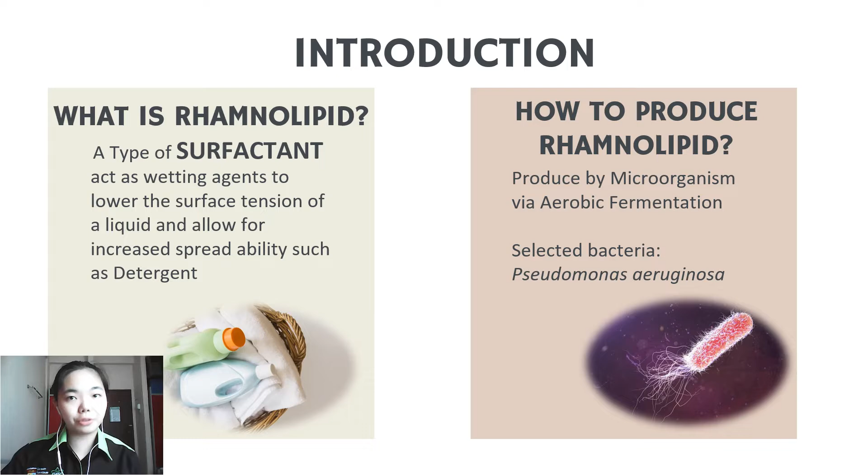Usage and applications of rhamnolipids. Firstly, bioremediation. Rhamnolipids are used to remove heavy metal and petroleum pollutants from contaminated sites. Secondly, agriculture. Rhamnolipids play an important role in the efficiency of new biopesticides. Thirdly, food industry. Rhamnolipid can improve the stability of dough, texture, volume, and conservation of starch-containing products.

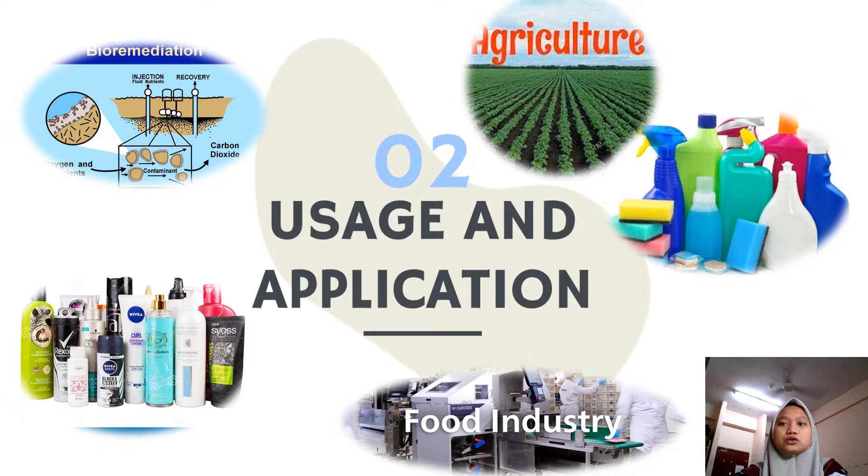Next, cosmetic and pharmacy industries. Used in several healthcare product formulations such as toothpaste, deodorants, and contact lens solution. Lastly, detergent formulations, used as biosurfactant.

Next is economic analysis of rhamnolipid. The figure shows the global demand and supply graph of rhamnolipid from the year 2019 to 2026. The rhamnolipid market is expected to grow with a CAGR of 5% from the year 2020 to 2025. Next, market price of rhamnolipid. The global rhamnolipid market is predicted to be at 4.2 billion USD in the year 2017 and to reach 5.52 billion USD by the year 2022 with a CAGR of 5.6%.

Next, for plant capacity, there is a deficiency of 250.6 kilotons of rhamnolipid globally in 2026. We decided to produce 5% of the global deficiency, which is 12.53 kilotons of rhamnolipid. Our plant will operate for 8,520 hours and can produce 1,470 kg per hour of rhamnolipid.

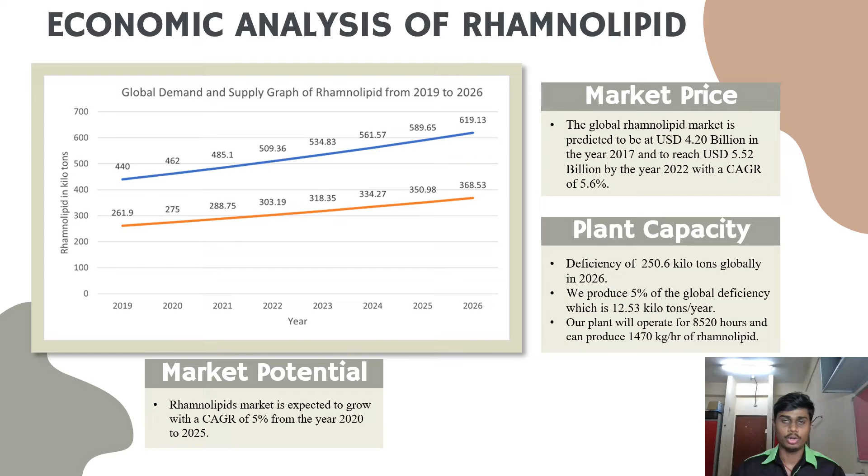The 4 main processes in the production of rhamnolipid by Pseudomonas aeruginosa are seed preparation, fermentation of the carbon source, which is glycerol, and the nitrogen source, sodium nitrate, in the presence of oxygen gas to produce rhamnolipid, followed by the extraction of rhamnolipid through acid precipitation and the purification of rhamnolipid by petroleum ether.

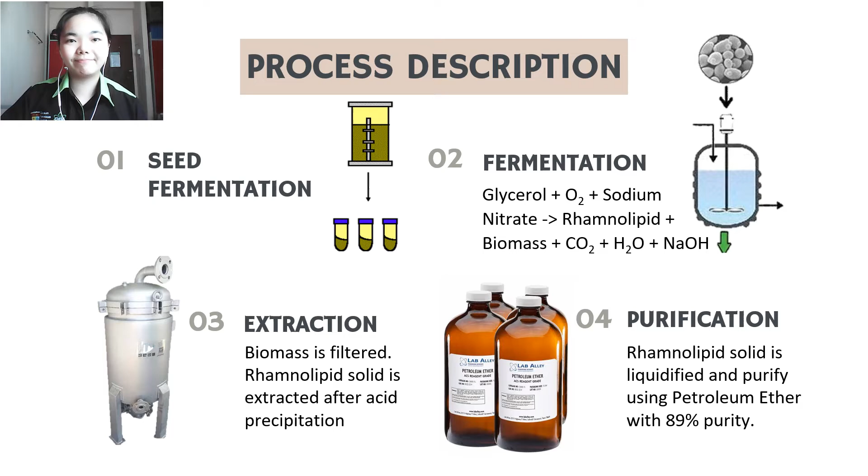This is the process flow diagram of the production of rhamnolipid by Pseudomonas aeruginosa. In the process flow diagram, we include a stream table with temperature, pressure, phases, as well as the mass flow rate of the raw material, product, and byproduct for each stream.

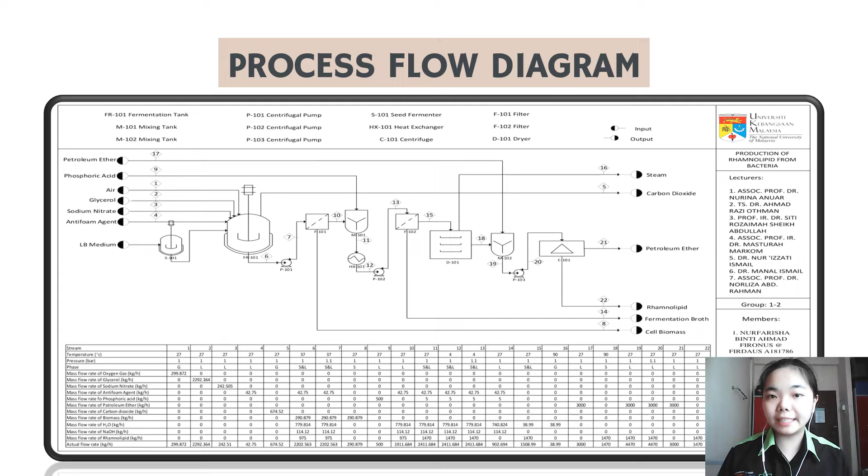For the safety issues, there are certain materials that should be handled with precaution as they can be harmful. The first one is sodium nitrate, which can cause irritation to the eyes and skin when in contact. And the second one is phosphoric acid, which can cause severe skin burns and eye damage. Therefore, it is important to store and handle them in the right way.

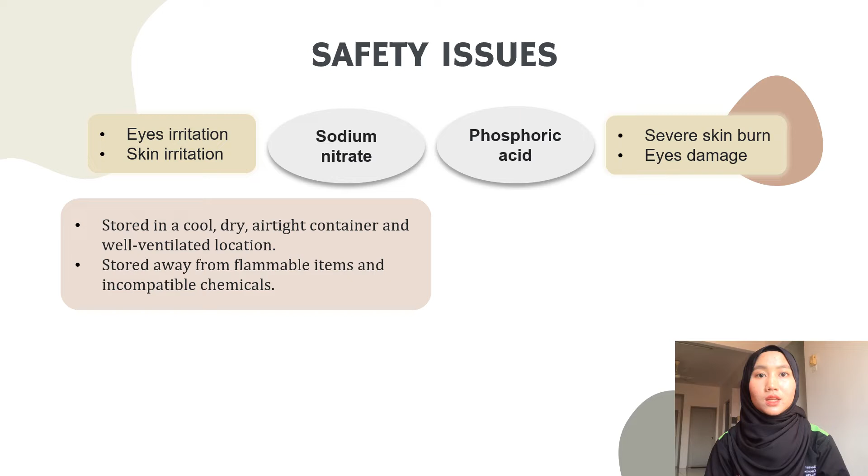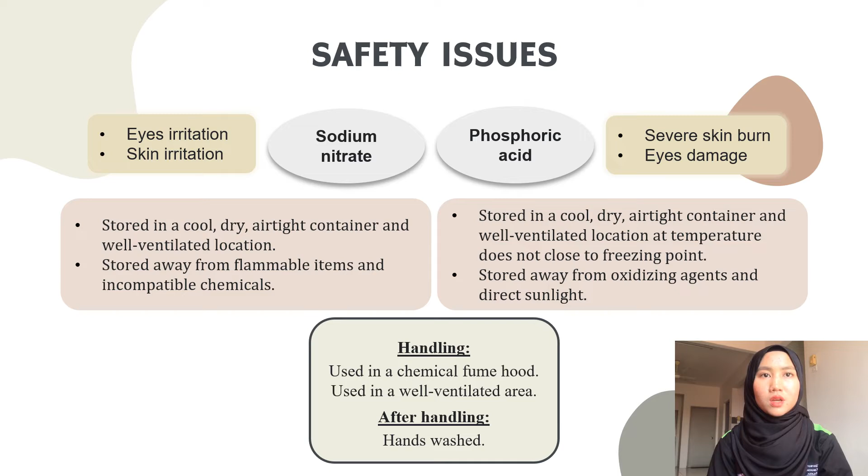Sodium nitrate is stored in a cool, dry, airtight container in a well-ventilated location away from flammable items and incompatible chemicals. And the same goes for phosphoric acid. It is stored in a cool, dry, airtight container in a well-ventilated location at a temperature that is not close to freezing point, away from oxidizing agents and direct sunlight. Also, they should be used in chemical fume hoods and well-ventilated areas, and make sure to wash hands after handling.

Environmental issues. The treatment and disposal for biomass is heating to approximately 225 until 275 degrees Celsius using a thermal decomposition process. At this temperature, a portion of the compounds that are volatile also evaporate and can be used as a fuel to power the process.

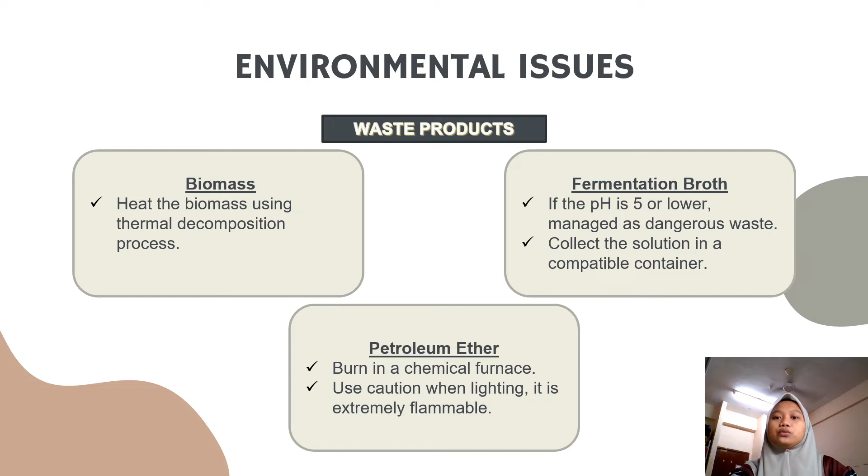Next, fermentation broth. If the solution has pH 5 or lower, it must be managed as dangerous waste. Collect the solution in a compatible container with a vented lid designed for acid and base storage. Lastly, petroleum ether. Burn in a chemical furnace equipped with an afterburner and scrubber, but use caution when lighting because the material is extremely flammable.

Next is the mass balance of the rhamnolipid. In the fermenter, the mass balance is balanced at both sides with a value of 2877.491 kg per hour. Then, the overall mass balance is also balanced at both input and output with a value of 6377.492 kg per hour.

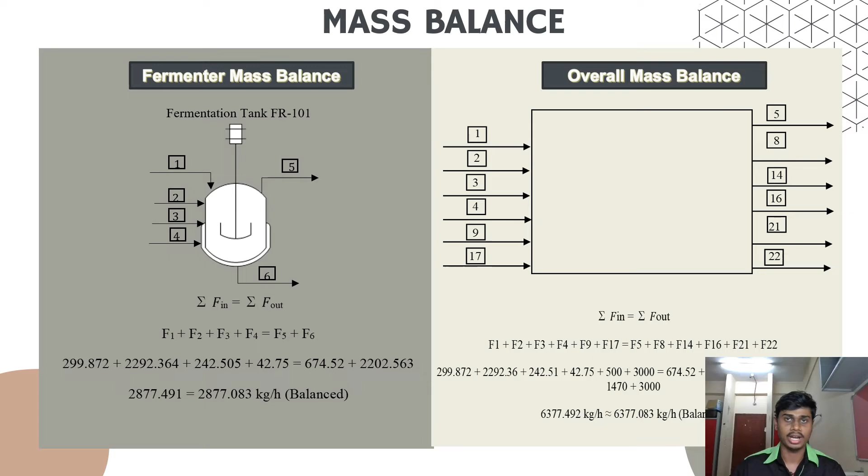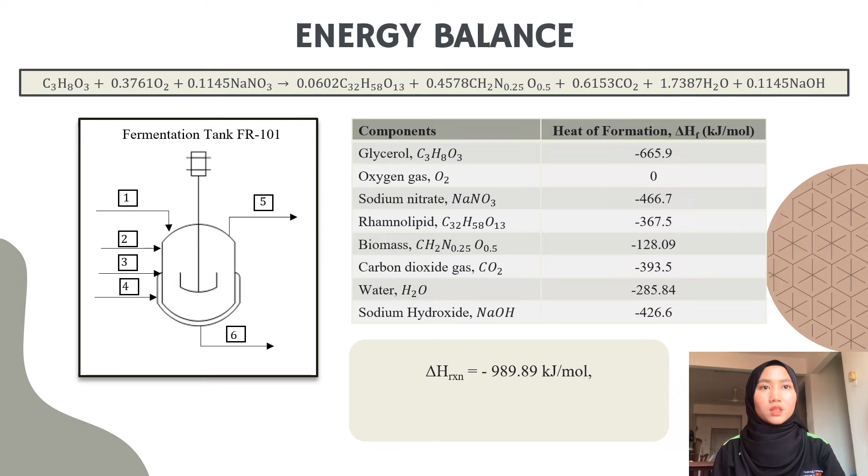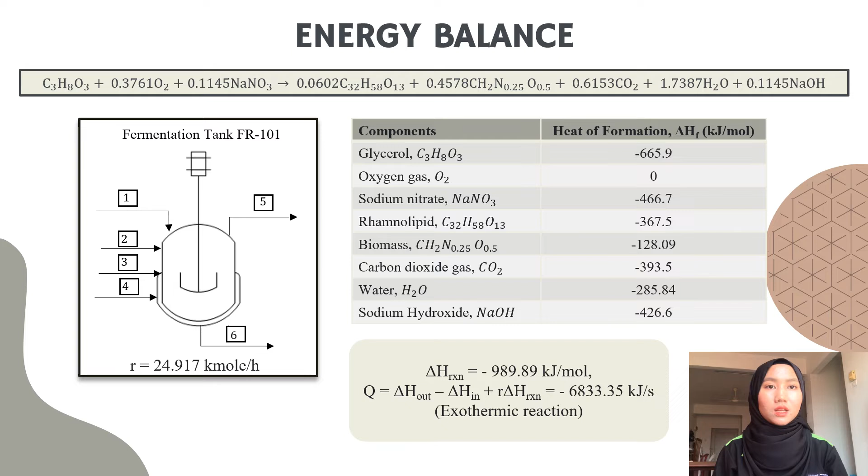Next is the energy balance at the fermentation tank. The enthalpy of reaction that we calculated using the components' heat of formation is equal to negative 989.89 kJ per mole, and with the value of R equal to 24.917 kmol per hour, we obtain the value of heat transfer Q equal to negative 6833.35 kJ per second. As the value is negative, we know that heat is released and the reaction is exothermic.

Next, for the thermodynamic task, the value of the equilibrium constant calculated is 1.1113. Then, assuming all components are in liquid phase and an ideal solution, the extent of reaction calculated is 10.215 using the equation shown. In the next part, there is a percentage error between the composition of biochemical equilibria and the composition based on material balance, which ranges from 5 to 12%. This shows that the material balance calculations are more accurate because no assumption is made.

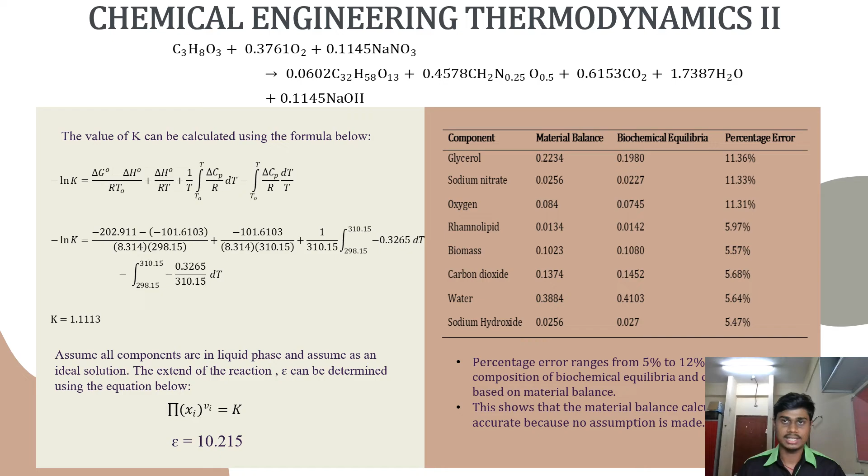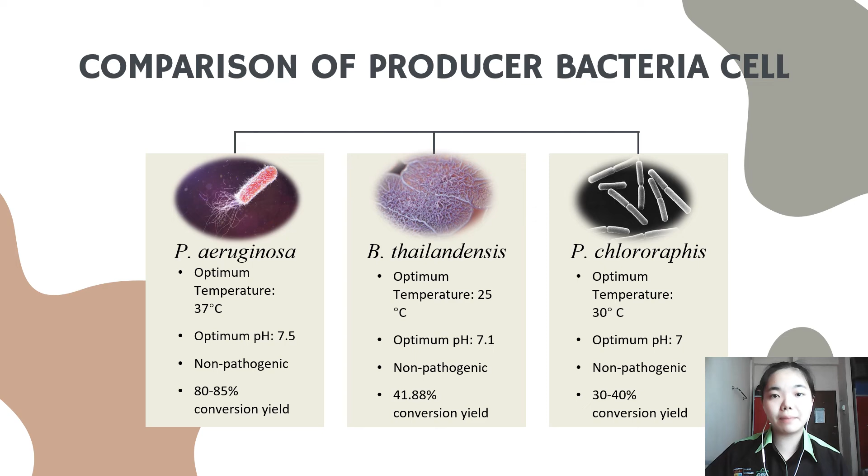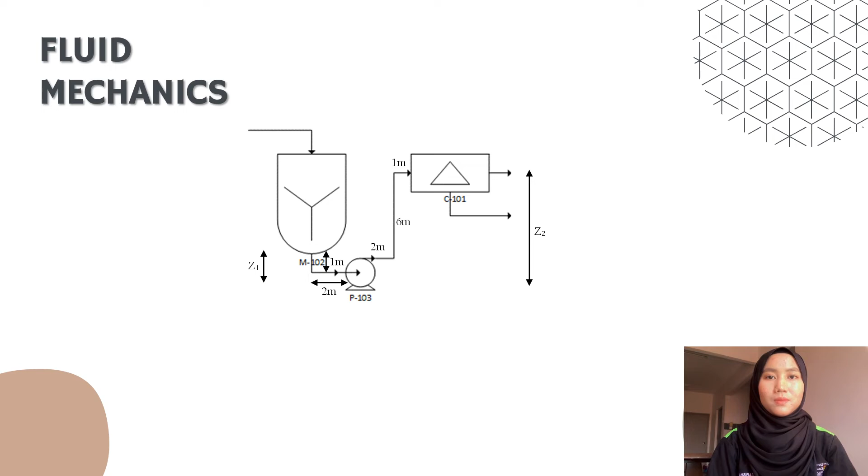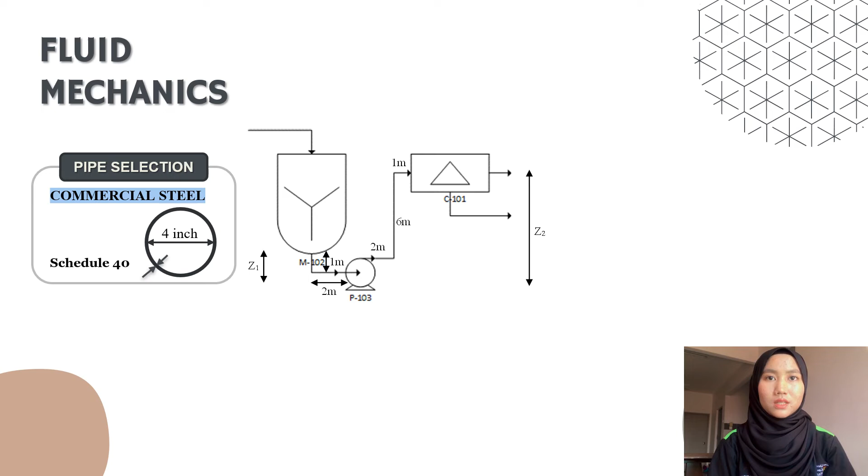For the fluid mechanics part, we chose to analyze the pump P103 between the mixing tank M102 and the centrifuge C101. The pipe that we chose to use is commercial steel Schedule 40 with a 4-inch nominal diameter. As the Reynolds number obtained is more than 4,000, the flow is turbulent, and the total friction loss calculated is 0.2989 joule per kg. And from the mechanical energy balance, we obtain that the work done by the fluid is equal to negative 62.34 joule per kg.

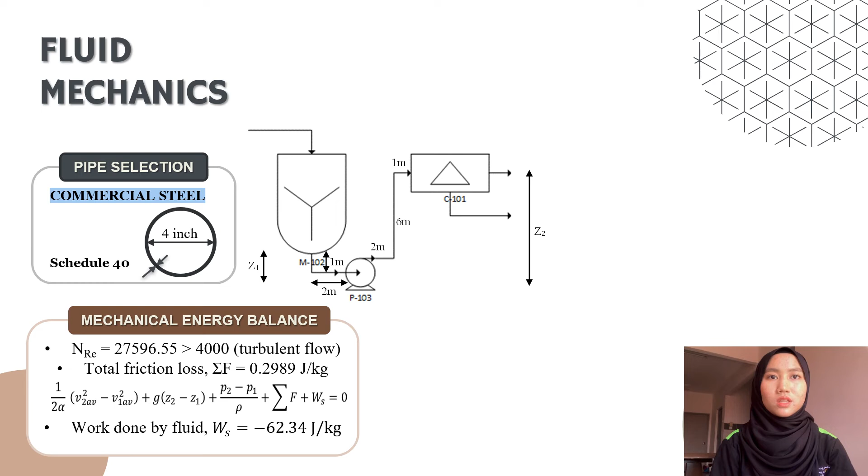The pump that we chose to use is the centrifugal pump, and its suction head calculated is equal to 139.788 meters square per second square. Meanwhile, the discharge head calculated is equal to 201.962 meters square per second square.

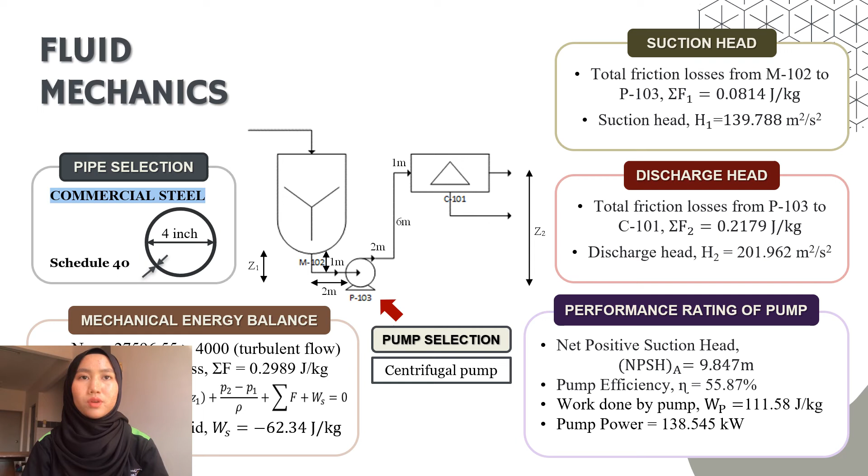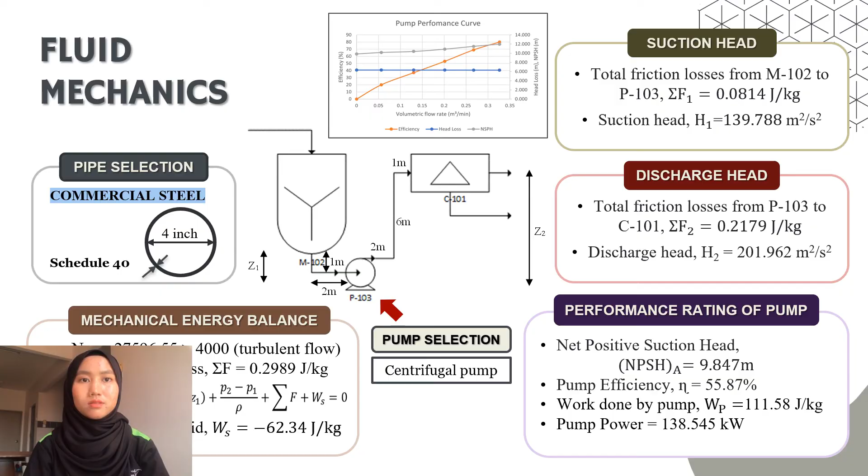The waste products for this production are carbon dioxide, petroleum ether, water, fermentation broth, and cell biomass. Since the heat of reaction is less than 0, the fermentation process is an exothermic reaction. Total friction loss in the pipe is 0.2989 joule per kilogram, while work done by the fluid is negative 62.34 joule per kilogram. Net positive suction head of the pump is 9.847 meter and pump power is 138.545 kilowatt. Lastly, the efficiency is 55.87%.